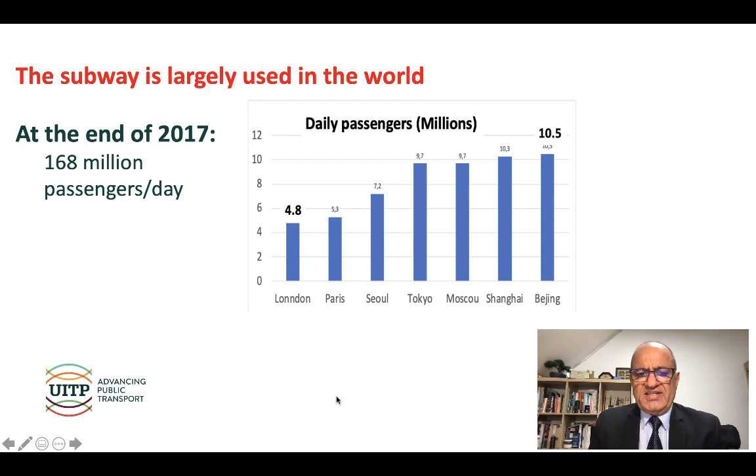First of all, the question is why should we care about the health risk in the underground space? If we look to the underground space today, it's largely used. At the end of 2017, we had every day about 160 million passengers, a lot of people. And in some subways, such as Beijing and Shanghai, every day we have about 10 million passengers. And in London and Paris, we have about 5 million passengers. It means that only on the subway, we have a lot of people every day in this space.

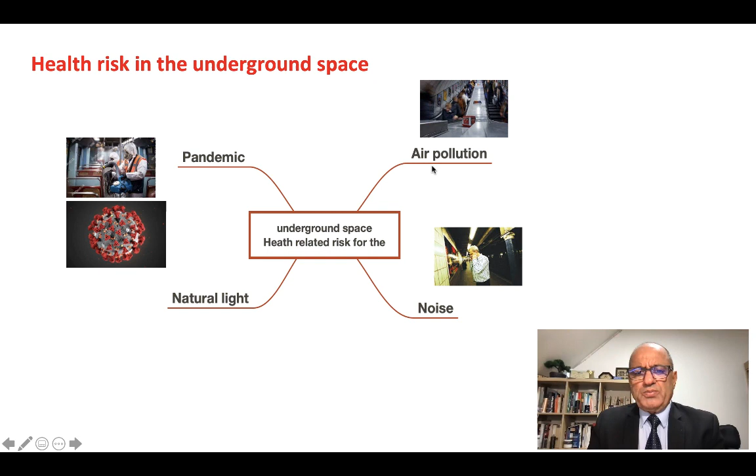Now, in this space, we have some risks for the health, one which concerns the air pollution. The noise also is very serious in the underground space. Also the question of natural light, lack of natural light. We don't have enough natural light, mainly for people who stay a long time in the underground space. And this year, we have this big problem with the pandemic. In my presentation, I will focus on air pollution and on the pandemic. Let's look, first of all, at the air pollution in the underground space.

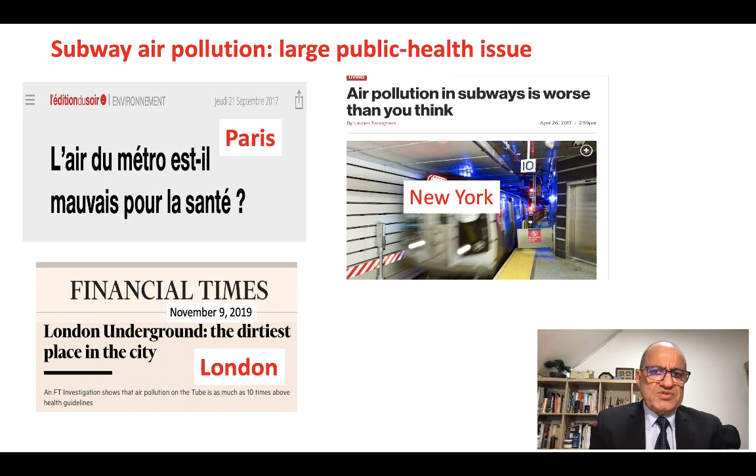This problem is considered today as a large public health issue. Look at these covers of magazines and newspapers in Paris, London, and New York. They speak about the risk of the air quality in the underground space. That's why today this problem is considered as a large public health issue.

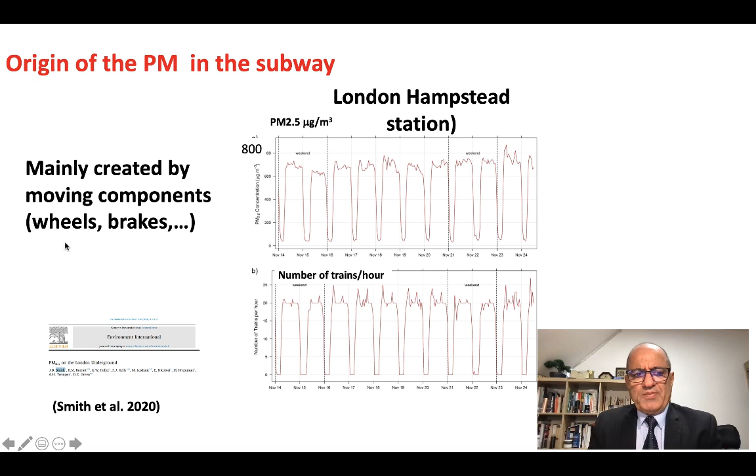And if we look at the origin, in the same station, if we look at the daily variation of the PM 2.5, we can see that it has a very good correlation with the number of trains. When we have a lot of trains, the PM is very high. When we have few trains, the PM is very low. And it's almost like that all over the week. It means that this PM pollution is mainly created by moving components. Mainly it comes from wheels, brakes, and so on.

Now, what is the impact of this air pollution? Some data show that the air pollution in the subway is about 8 times more genotoxic than the outside air. And also it could cause some DNA damage. That's why it has a very important impact on cardiovascular diseases, lung cancer, pulmonary diseases, and asthma. It's really very serious for human health.

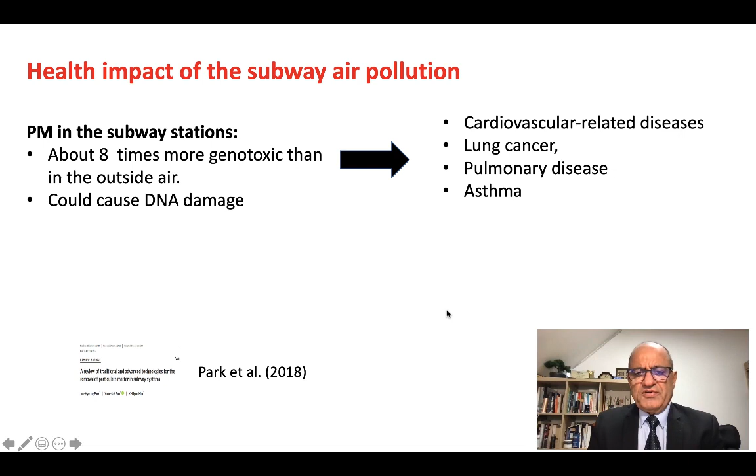That's why international organizations have set some limits for the PM level. For the PM10, WHO gave the limit of 20 as an annual mean. The European Union, it's twice. For the PM 2.5, which is more dangerous, the level is about half. It's 10 and 25.

We have some data from different regions in the world about the PM level. You can see that it's really very high, and about the compliance rate according to the WHO standard, you can see that globally, only about 15% of the subway stations respect the WHO standard. And it's mainly in Europe where the level is much lower, it's about 10%. This could be attributed mainly to the fact that the subway in Europe is much older than that in other areas.

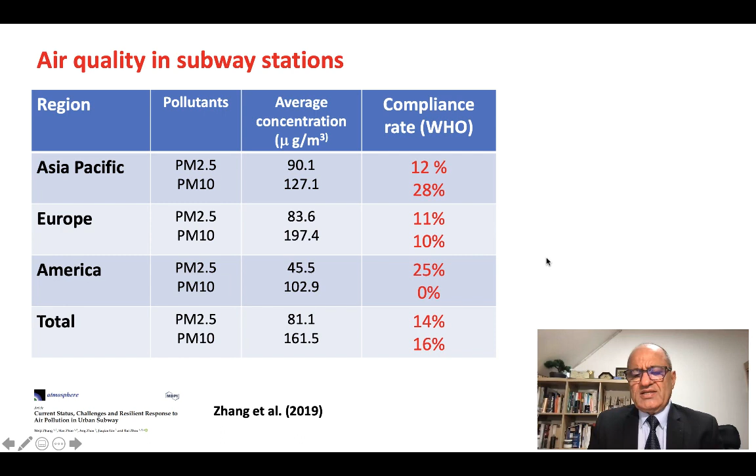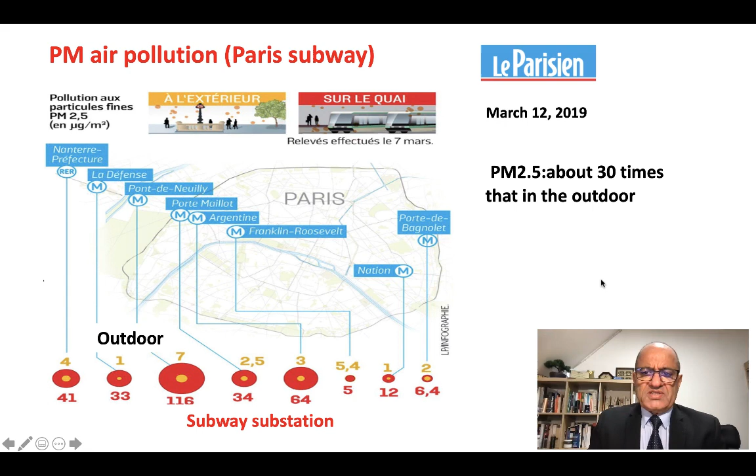Globally, we have something which could be in the underground about 30 times higher than what we have in the outdoor. And this result also confirms what we have shown before.

What are the factors which impact the subway air contamination? First of all, we have some factors which are related to the subway station. The depth is important, the age, the design, and also the use of what we call the platform screen doors. The subway vehicle, which is at the origin of the contamination: what are the type of brakes, the wheels, and also what about the cleaning of the vehicles.

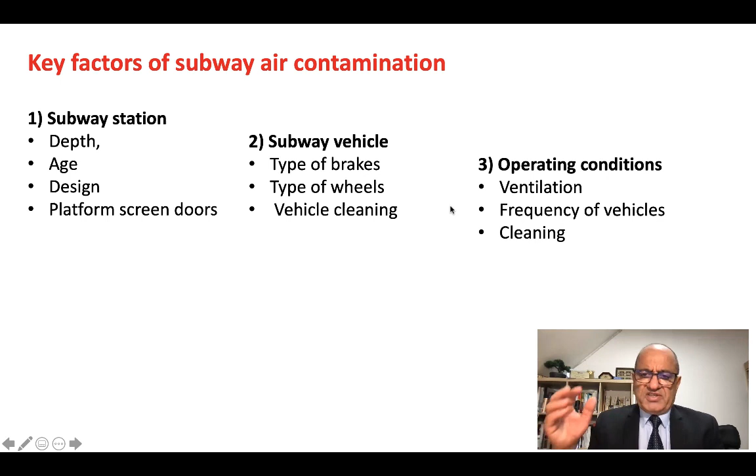We have also some operating conditions. Ventilation is very important. The frequency of vehicles is very important. The cleaning is also very important.

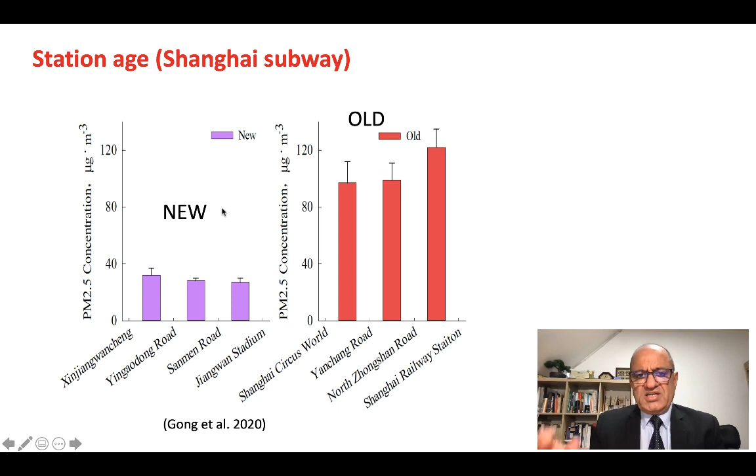Let's look to the impact of the station age. We have some data from Shanghai subway where we compare the PM level in new stations to that in old stations. You can see the level in new stations is less than half of what is in the old stations. It means that the age of the station has a very important impact on the PM concentration.

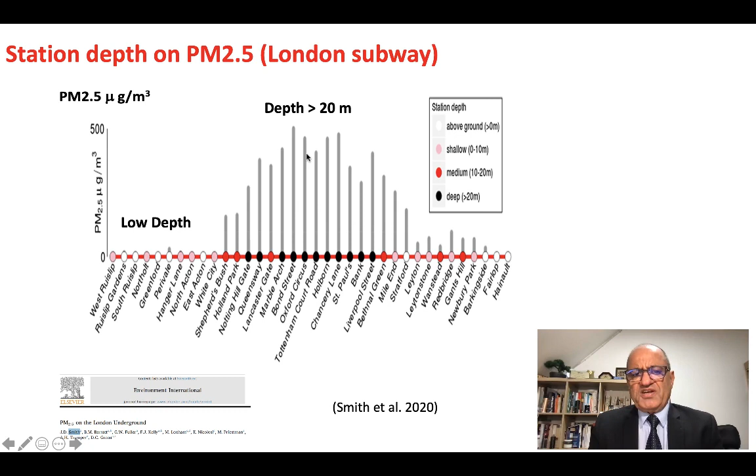Concerning the depth, we have some data from London subway where we have here the level of PM with depth in all of these areas. The depth is larger than 20 meters, means that we have deep stations, and here we have low depth stations, and you can see that the concentration increases quickly with depth, because for deep stations the ventilation is much more difficult. That's why we have this effect of depth.

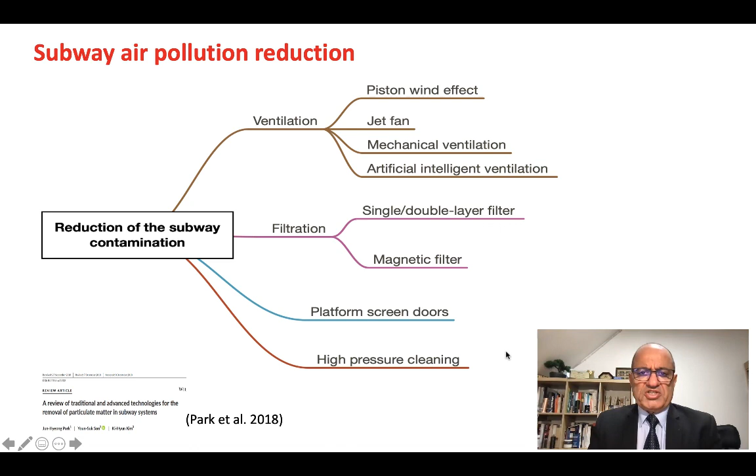Now, what about the methods which are used to reduce the air pollution in the subways? We have different methods which are related to the ventilation, filtration, use of filters, use of platform screen doors, and also the question of cleaning using high pressure. Let's look to the efficiency of these methods.

If we look to the ventilation, in some stations we use what we call the piston winds, the movement of air which is created by the train movement. Tests have shown that this effect has very good performance to reduce the air pollution, but mainly in wide stations and double tracks. And also we know that this effect is very interesting for energy savings.

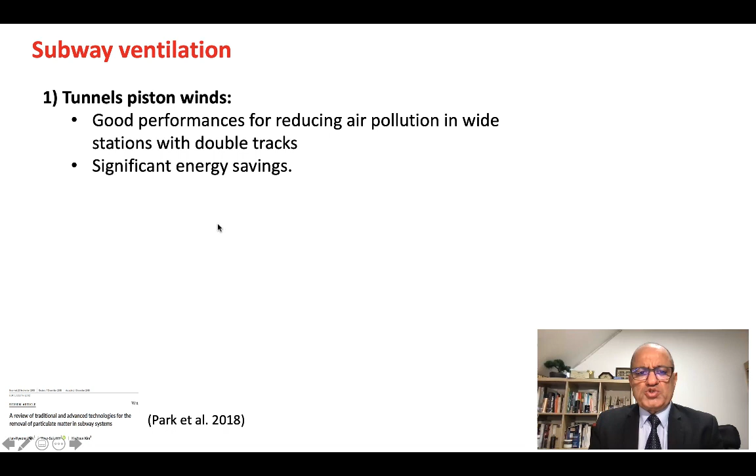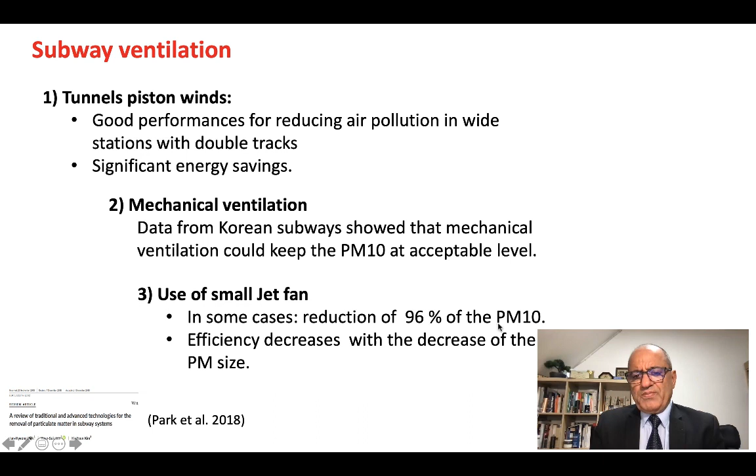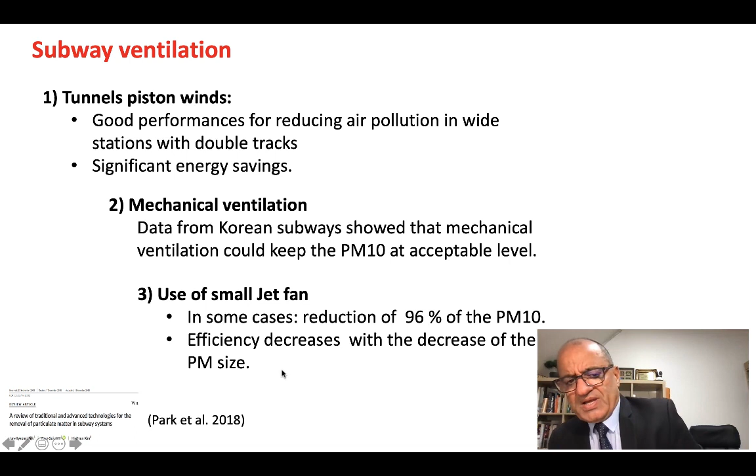For the mechanical ventilation, we have also some data from the Korean subway, which show that it's efficient for PM10, not for PM2.5, not for small particles. And the small jet fans, also we have some results which show that they could be very efficient for the PM10, but their efficiency decreases with the decrease in the PM size, means that they are not good for PM2.5 or PM1.

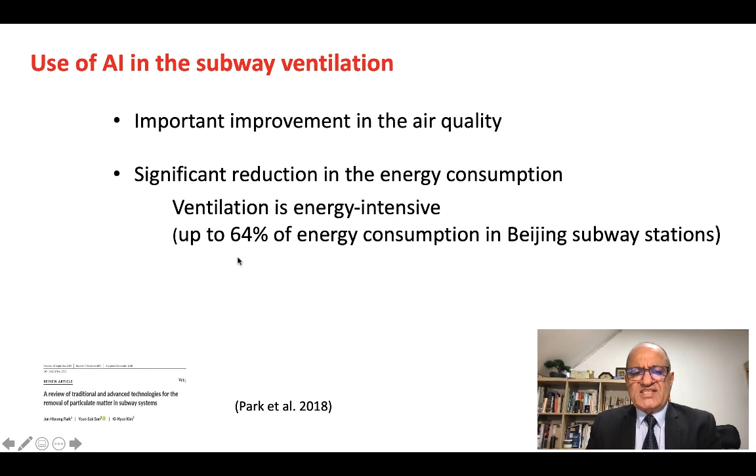Now, we know that today we use more and more artificial intelligence for the ventilation. We have also some results, we can find them in this paper, which show that we have very important improvement in the air quality. So it is really very interesting to use AI to control the ventilation. And also it is very good to reduce the energy consumption, which is very energy intensive. If we take the Beijing subway station, about 64% of the energy consumption is used by the ventilation.

Now for the air filtration, we have some tests also about large particles, PM10, showing that both single layer and double layer give good results. But we don't have good results for the PM2.5. Now, some stations also use magnetic filters, mainly for iron, and they showed that they have good performance for PM10, but also for PM2.5.

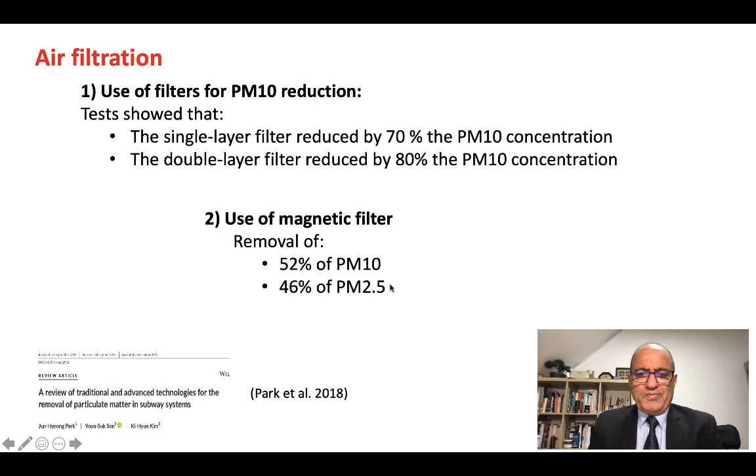It's a good result. Now, what about the platform screen doors, which separate the train from the station? We have also some results which show that we have a very good effect on the station platform. It reduces by about 50% the PM2.5 concentration. But it has a negative effect because it increases the PM concentration in the tunnel, because the PM stays in the tunnel and in the vehicle. And this increase could be really very important. Here we have some data from a Beijing station which uses this technology.

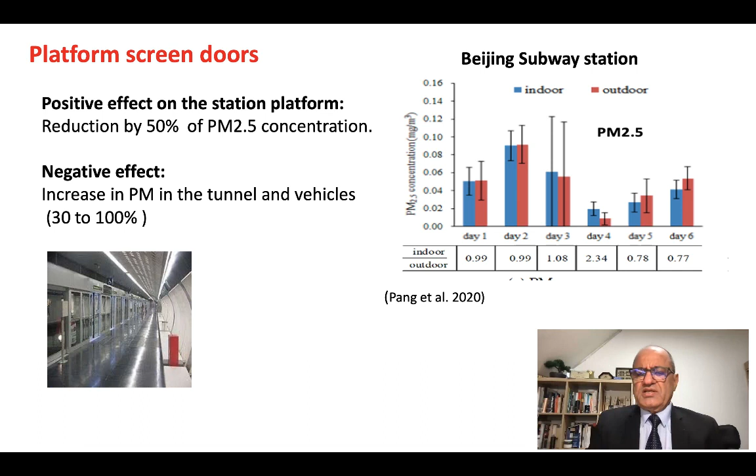If we compare the indoor and outdoor PM2.5 levels, we have almost the same result, which means that these doors are very efficient to reduce air pollution with PM concentration in the subway station.

For high pressure cleaning, we also have tests in Taiwan which show an important decrease in PM10 concentration, about 50%, and 30% decrease in PM2.5 concentration.

That's why today we have a very good market for air cleaning in the subway station. The global market is about $15 billion, mainly in Asia Pacific and Europe. This is really very interesting for professionals.

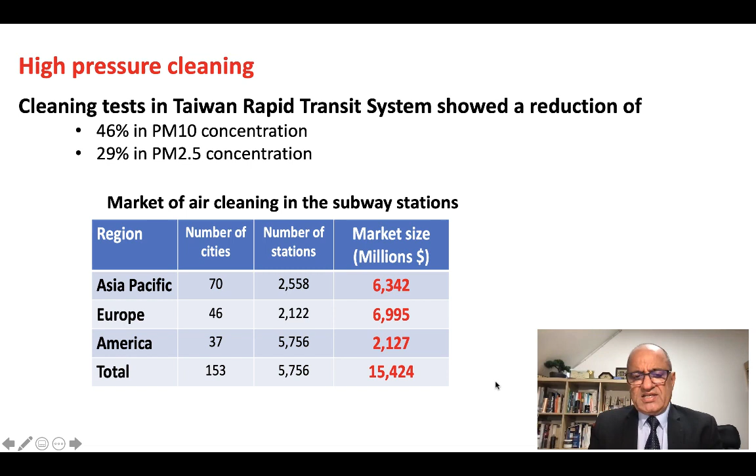Now let's go to the second part, which is about the pandemic risk in the underground space.

We have data showing that public transportation has high risk for pandemic spread. First, because we have a lot of people and the space is confined. We have difficulties controlling access and identifying potentially contaminated people. Also, we have a variety of large contact surfaces like ramps, doors, opening systems, and so on. It's very difficult to control all of these surfaces.

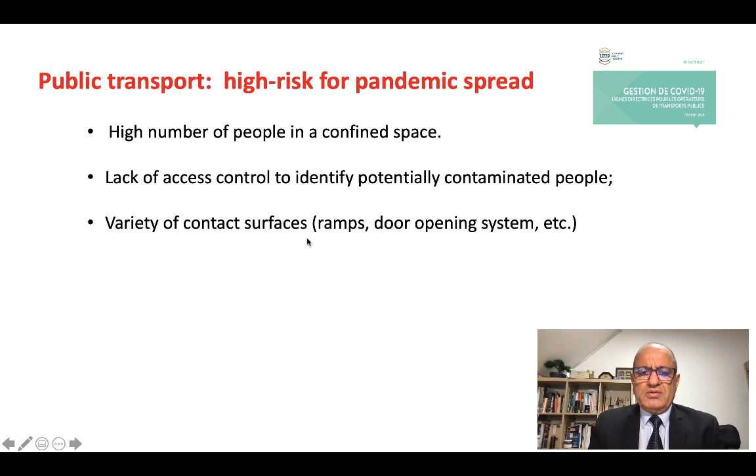The COVID pandemic had a very important impact on subway traffic. Let's look at the situation in London. In March, the subway had full capacity, but with the lockdown, the capacity dropped to only 5%. After it recovered with the unlockdown, but only up to about 40%. You can see that the subway did not recover its initial capacity.

This represents a real problem for the income of the company which operates the London subway.

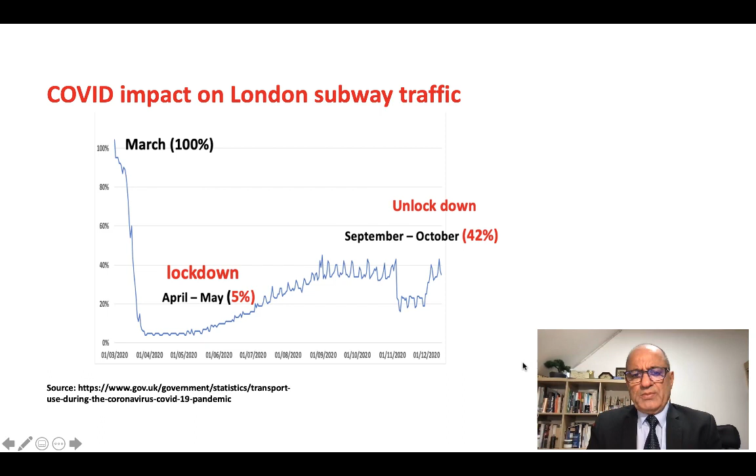If we look at the impact on mobility in the city of London, you can see that buses also suffered from COVID, but less than the subway, and we had very important development of the bike, which is considered safer for mobility.

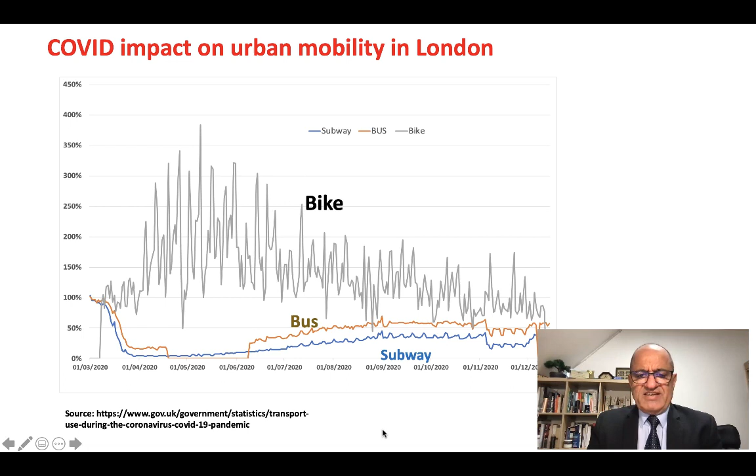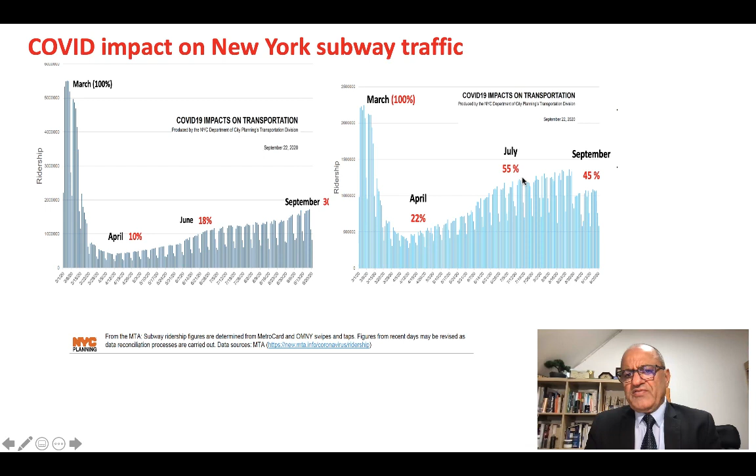If we look at the data for bus transportation, it dropped only to 22%, and it operated better than the subway, recovering up to 55%.

The question is, what about the future? Could we really be optimistic for underground post-pandemic mobility?

We have different issues. First, we know that with the COVID crisis, we had a reduction in mobility demand because of smart services such as e-services for administration, health, education. People now don't need to move to use mobility - they can do it at home. The same thing for work.

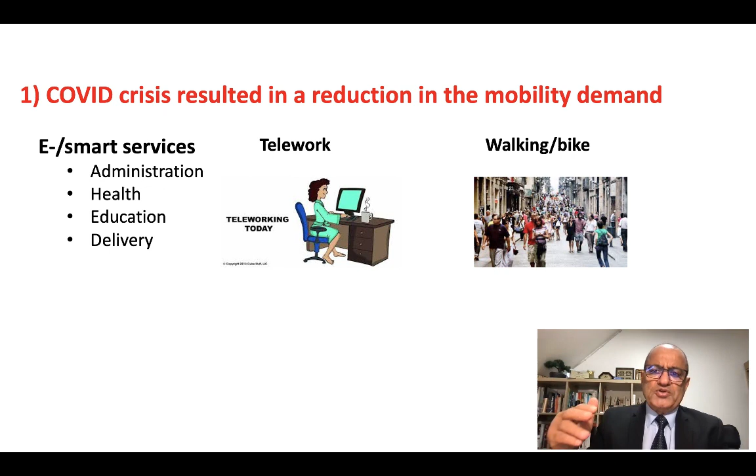Also we had very important development in what we call soft or active mobility, such as walking and bike. Globally, we have a reduction in mobility demand, and this could be very interesting, mainly to reduce the peak demand for the underground space.

Second, we had interesting results from observations that COVID contagion risk in public transportation is low. Studies from Austria, France, Japan, New York, and Singapore say that if we take preventive measures, the risk of contagion was low in public transportation.

In France, we also have data showing that only 1% of COVID clusters are linked to public transportation. We also have data from the London subway which said there is no evidence of COVID transmission in the subway. All of these results are really very encouraging.

It means that we were more pessimistic about public transportation than the reality warranted.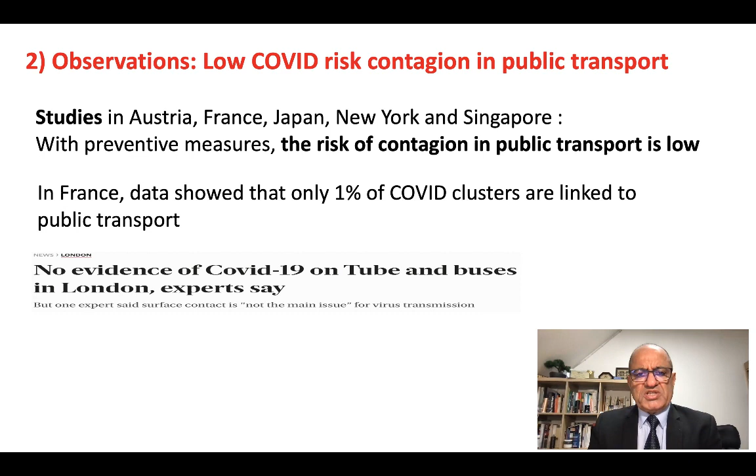The pandemic also created some innovation in underground mobility, first regarding the question of materials used in the subway or underground space. We have tests which show that the virus survived for more than 3 days on plastic and stainless steel, but less than 4 hours on copper.

It means that we can change some materials in risky areas. Some companies proposed detecting, using cameras, what they call hotspot surfaces which are largely used or touched by people. When these surfaces are detected, they use adequate material with low virus survival time.

Other companies worked on what we call flexible design - the question of how we can make underground spaces and vehicles more flexible for easy adaptation to demand, because we expect rapid changes in demand, and also if we can propose new services.

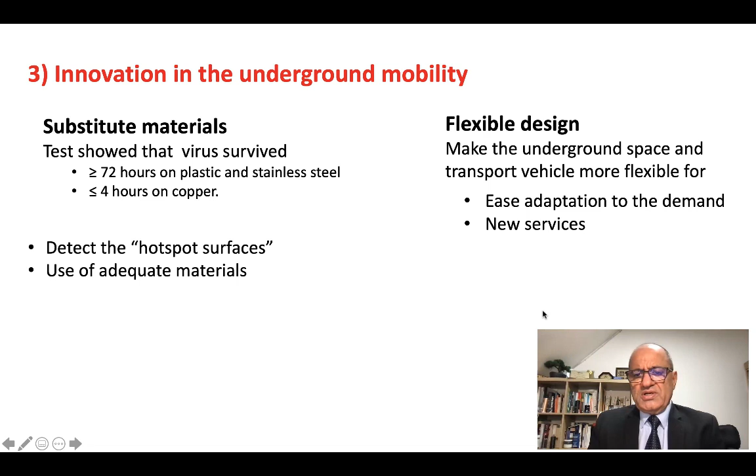We have also innovation in hygiene and safety standards, such as the use of thermal and optical sensors to control access and walking lanes.

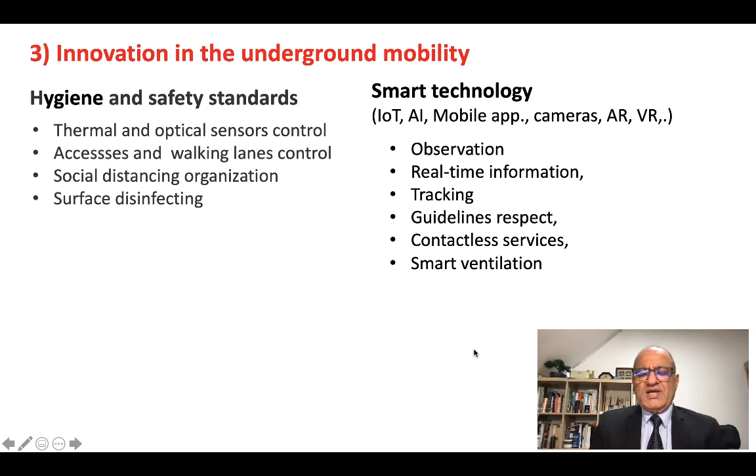The question of how we can organize social distancing, and also surface disinfecting. Smart technology with IoT, AI, mobile applications, cameras, augmented reality are very useful for observation, to understand what is happening, give real-time information, for tracking, to enforce guideline respect, to develop contactless services, and also for ventilation.

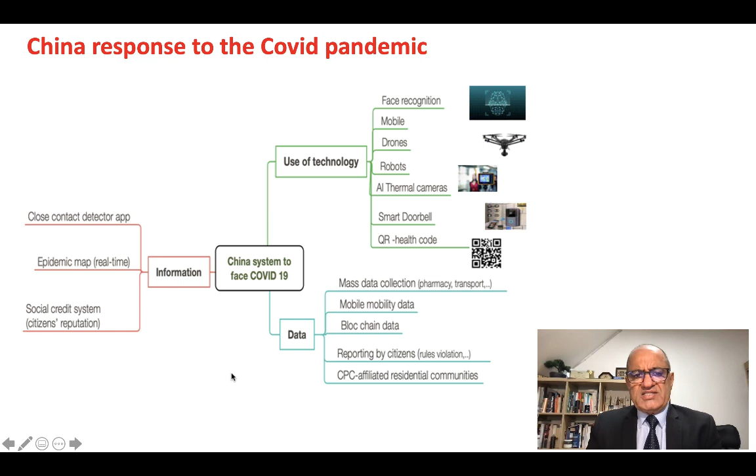If we look at China's response to the COVID pandemic, all of these technologies were really used and implemented. It's very interesting, and if we look at the results, with other measures, we can see that in China the daily contamination in the first wave was only about 5,000 a day, and we didn't have a second wave.

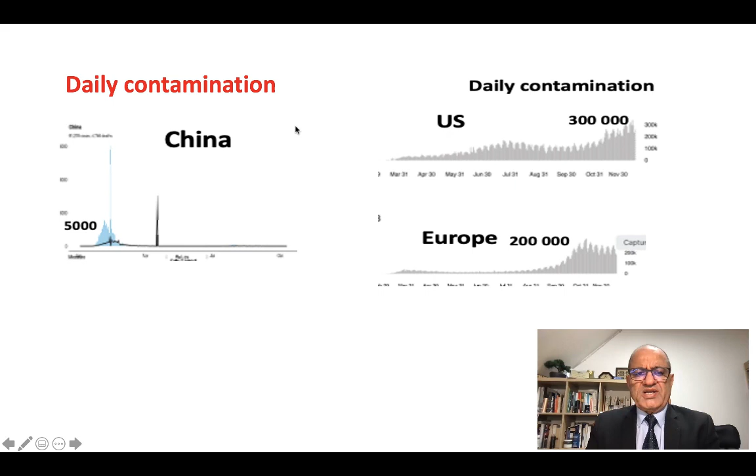If we look at the situation in the US and Europe, you can see that the daily contamination for the second wave is about 200,000 to 300,000 compared to 5,000. This means that this technology could be really very interesting to reduce daily contamination.

Now, in both Europe and the US, governments put a lot of money into what they call the pandemic economic recovery plan. It's mainly for the economy, but some amount is also used for innovation and for sustainability, green technology, and so on. Here we have a very good opportunity.

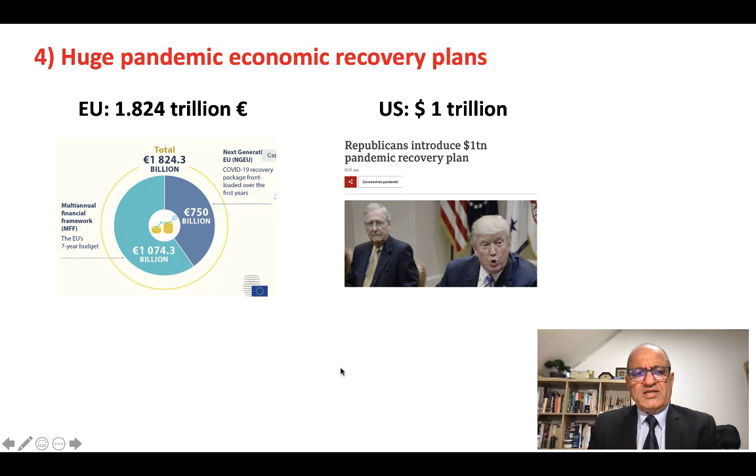These projects are considered among the most important in the history of the EU. Today we have a lot of money from public power in order to develop innovation and to fight the pandemic and develop the economy.

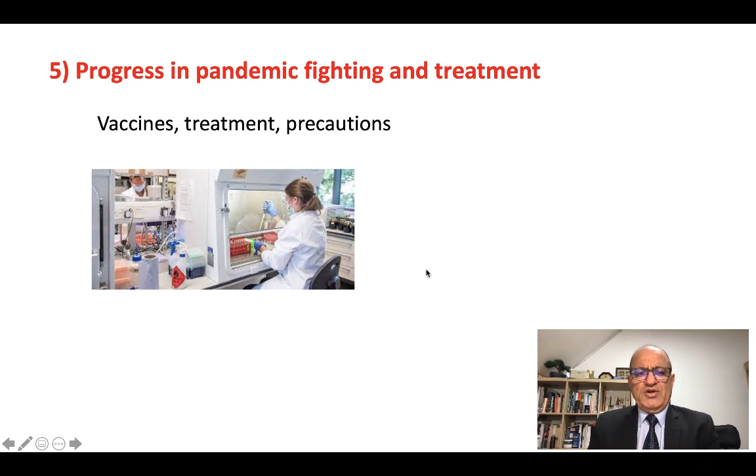We have also today very important progress in pandemic fighting and treatment. We have different vaccines, we improve the treatment, we have also more precaution.

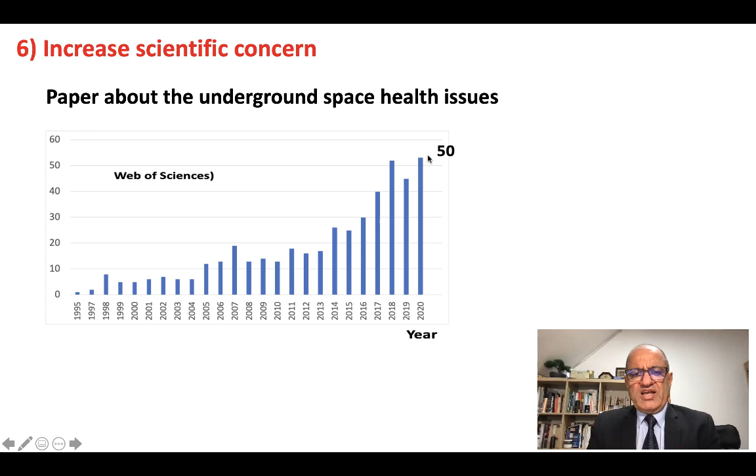If we look at the scientific research related to health in the underground space, you can see that in previous decades we had very little concern. This concern has now increased, and in 2020 we have about 50 papers in Web of Science, and the year is not finished. I think we will have more. This means we will have more and more research in this area.

Finally, what can we say about these important issues? We know that the underground space is really subjected to high health-related challenges. We have air pollution, the pandemic, but we have also other things which have very important impact on public health.

Today it's a question of public health, but it also has a very important impact on the economic model of the underground facilities. When the underground loses a lot of passengers, the economic model of the subway could suffer, and we have less money for maintenance, development, and so on. This is a very serious question.

It's not only about health; it's about the operation, the existence of the underground facilities.

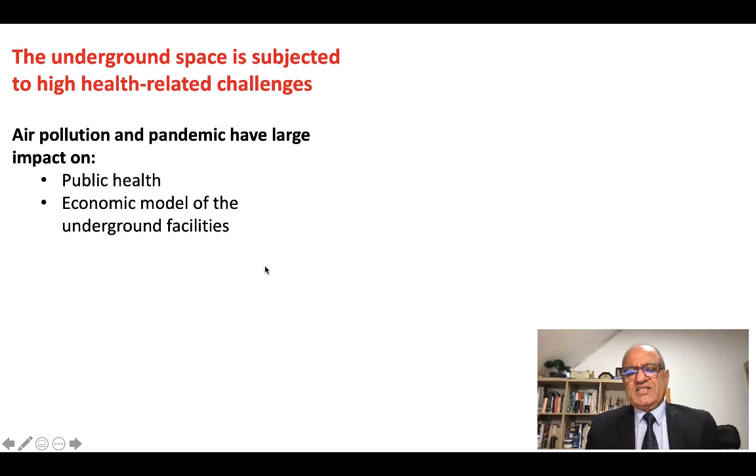Now we have some opportunities. I said we have good progress today in pandemic fighting and treatment. We have a lot of innovation in design, ventilation, and so on. We have, in some countries, a massive economic recovery plan with a lot of money, and we also see today an increase in public acceptability for urban disruptive change. We know that public acceptability could be a barrier to innovation implementation - this is also very important.

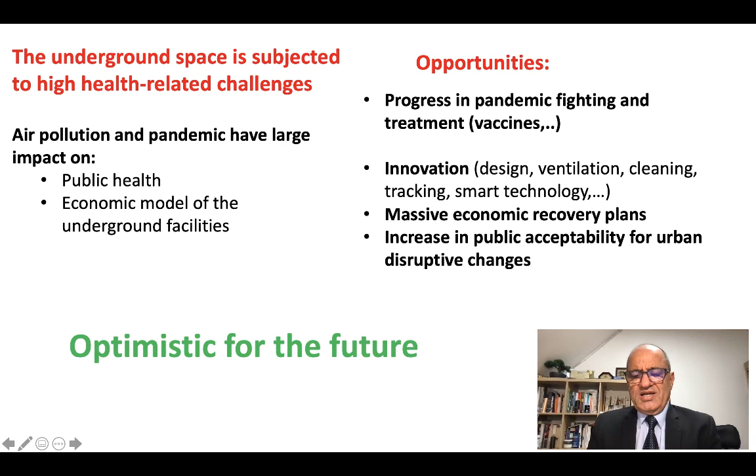For all of these factors, I think that we can be optimistic for the future. Thank you very much for your attention.